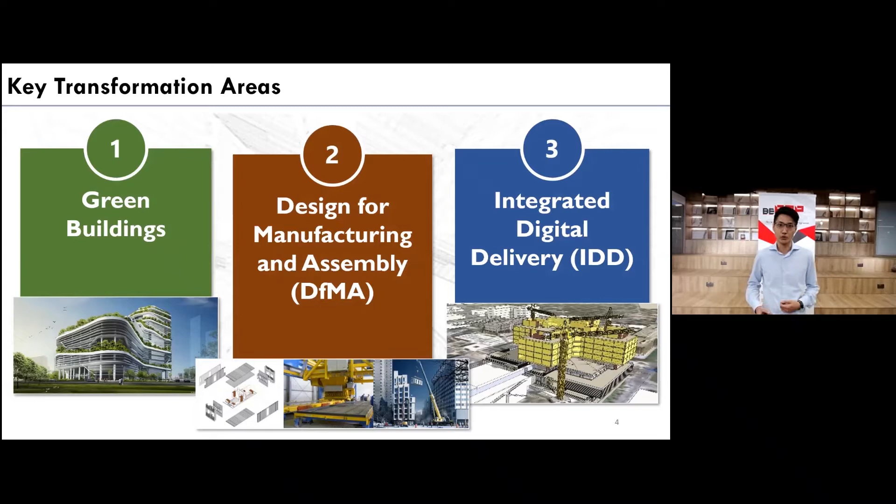To drive innovation and enterprise in these focus areas, BCA adopts a holistic approach. For example, with BEAMP, built environment firms are encouraged to pose their business challenges to the global innovation community. This is to widen the innovation base and to allow even proven solutions from outside our sector to be adapted for our needs.

Shortlisted innovators will develop the solutions with advisory from the challenge owner, who will also provide a test bed for the solutions. In the process, innovators will also receive co-funding support and be plugged into the sector for market development.

While BEAMP provides a platform to drive innovation development, we are also mindful that regulations clearance may sometimes impede adoption for certain technology, particularly when the technology is new in Singapore. Therefore, BCA also provides a one-stop solution called the Build Innovation Panel, or BIP for short, to facilitate the review of existing regulatory requirements that may discourage innovations.

For innovation projects which require guidance in regulatory matters, BIP will help to pave the way forward at any juncture during the course of innovation development. We also like to point out that BIP also facilitates regulatory clearance for industry-ready solutions that benefit the built environment, regardless of whether they came in through BEAMP.

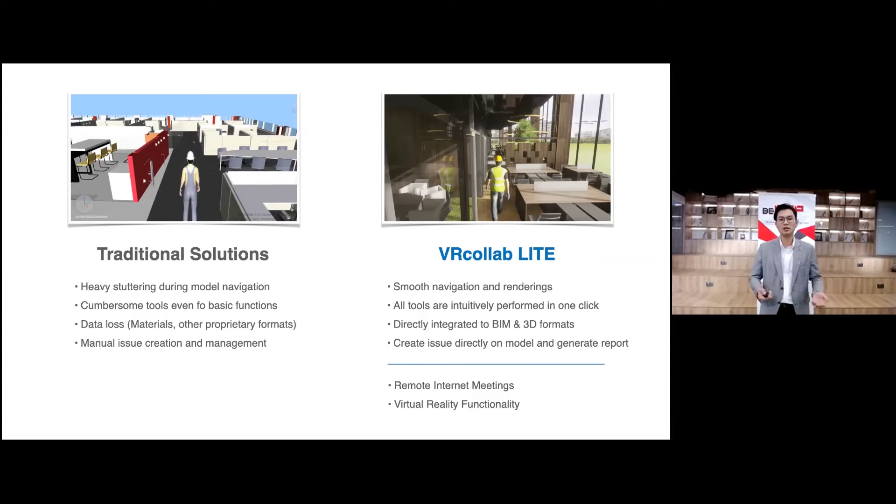So we recently commissioned a study whereby we studied 15 general contractors and builders around the world, who are our clients. This comprises about 217 surveyed users globally. Before using VR Collab, the man hours taken to coordinate in a week is approximately 90 hours or so. But after using VR Collab, week-on-week comparison, they managed to save about 20 hours a week coordinating with VR Collab compared to the current traditional way of doing things.

So coming to the end of my presentation, there's also a bit more of not only the product, but the projects and R&D that we're currently involved in.

For BEAMP, we were the first batch, and we're doing an HDB Auto Checker. For those of you that do not know, for the international audience, HDB is the Housing Development Board of Singapore, and 60% of all construction projects in Singapore is actually owned by HDB. So our Auto Checker allows us to check the building codes according to the BIM model that's submitted to HDB automatically.

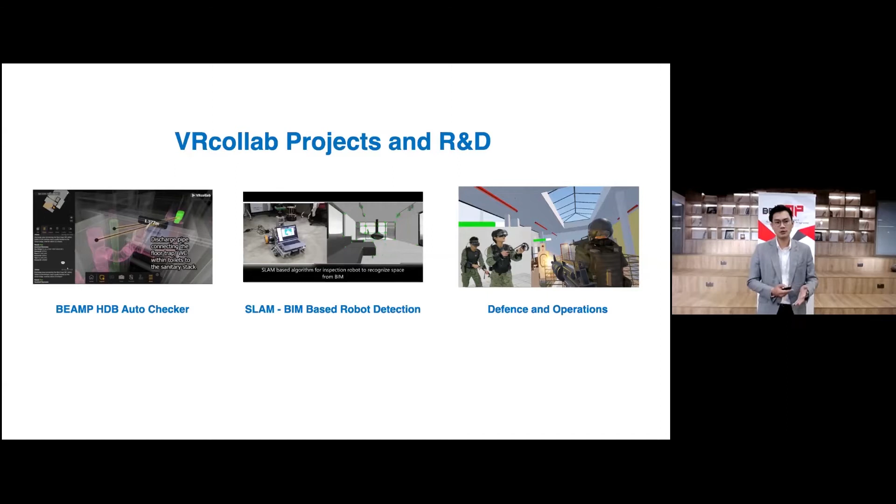Up next, we have Aviation Virtual. Aviation Virtual uses BIM-based AR for dimensional and spatial verification. Aviation Virtual, please.

Hi, I'm Chilang from Aviation Virtual. We are a 6-year-old SME, and together with Hendrik from the University of Glasgow, let me present to you our product, which is called BIM-based AR for dimensional and spatial verification.

So if you look at this, 3 simple steps: look, load, and verify. And with that, you could automate non-compliance checking and reporting for building design specifications and regulatory requirements. This product was conceived to solve this identified problem: how to conduct checks easily, faster, accurately, and also cut down on the back-end reporting writing.

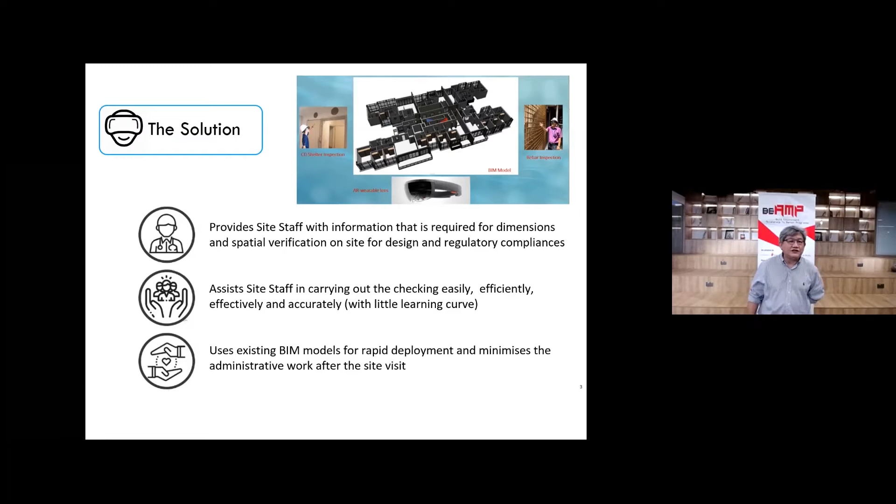Well, let's look at what the solution actually is. There are 3 important selling points for this solution. One is that we provide the staff with timely and accurate information needed to do their work on site. We also assist the site staff to carry out the checking easily, efficiently, and effectively. And finally, it also allows the BIM models to be deployed rapidly.

And I think in a nutshell, if you look at the product, the important takeaway is that within minutes, we could actually automate the detection of non-compliance, send images and data, or communicate with the site office, and at the same time generate the report for the site visit.

Besides the automated inspection and the BIM-based solution, we could also see that it will cost less compared to what exists, doing away with forms. In terms of data presentation, we're actually going to do it in 3D, VR, and AR. There'll also be tracking of the user, as well as automated signatures so we understand who the user is, and the data integrates with the BIM solution.

So what is the unique selling point of this solution? Well, the first is that we're transforming inspection with augmented reality. We also allow deployment of existing BIM models from any native software for rapid deployment as 3D models to be used in VR and AR devices, and finally allow you to carry out checking of buildings under construction and TOP easily and quickly.

So what is the business model? Most of our revenue will come from selling the product as it is. We could also customize the solution for different users, provide pay-per-use site services, as well as subscriptions, and also be involved in site projects.

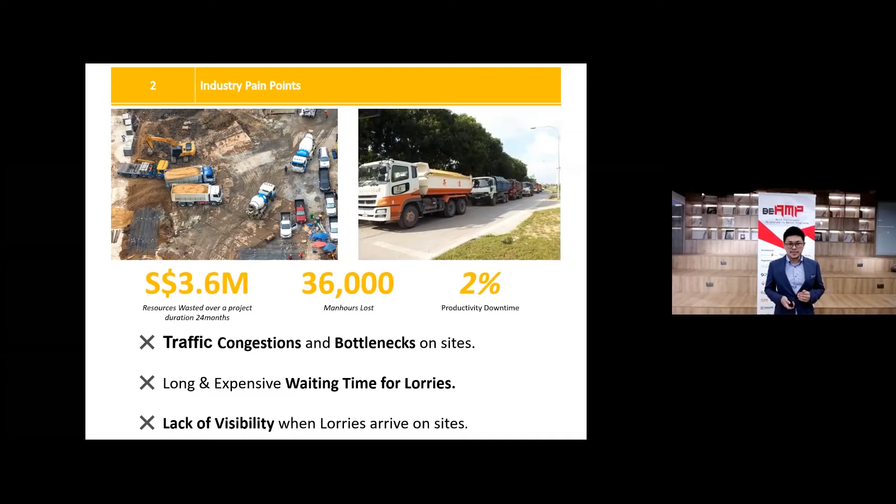So what is the solution? Espada DMS, which stands for Espada Delivery Management System, is a tool to help main contractors manage and monitor all deliveries to the construction site with a time slot management system and delivery scheduling. Subcontractors and suppliers will submit a delivery request, and the main contractor will either approve or reject it based on the availability of a slot and the priority of the material needed on site.

Once the subcontractor starts the journey, the main contractor can trace in real-time the location of the lorry and will be auto-notified of the incoming delivery. After the lorry has reached the site, the gate manager can check the condition of the material and check in the delivery status as completed.

With Espada DMS, there is no headache, no more congestion, no more bottleneck on site, which means that resources are used more efficiently and projects can run smoothly.

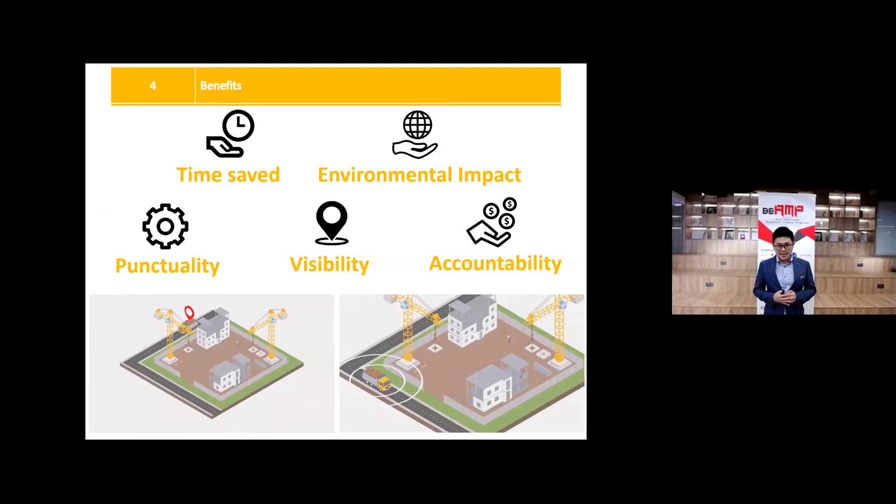So what are the benefits of Espada DMS? Main contractors save hours of waiting time. Queuing time for lorries is reduced. We also note reduction in CO2 emission and carbon footprint for your projects. Subcontractors and suppliers will be more accountable because they want to deliver on time to keep a good record.

Now, in terms of committed projects going forward, we will be running a test bed at BCA Academy Phase 2 and GTC multi-story recycling facility with Dragages and Boustead, with the main objective to reduce traffic congestion on site and queuing time for the lorries.

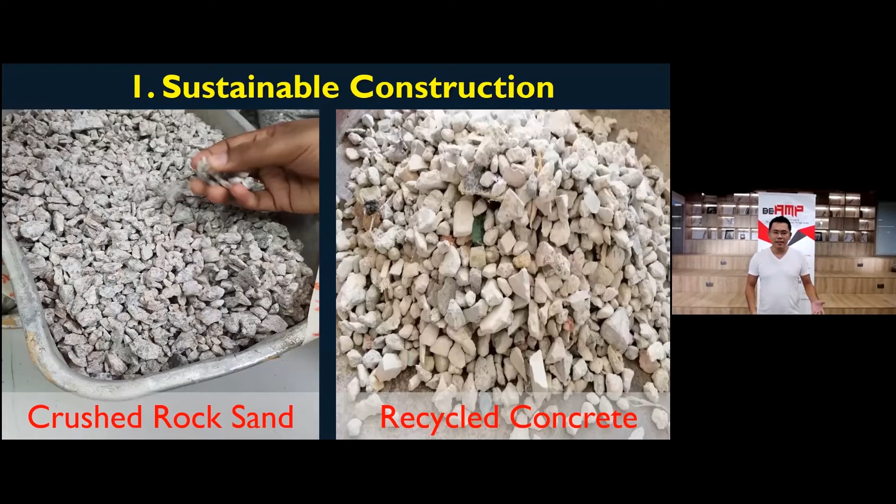Why it matters? Sand and concrete are key components of construction. Every year they cover about 1.2 trillion in market share. It's massive and impactful.

Environmentally, natural river sand has a limited source, and crushed rock is common and can be used as an alternative for sand. On the other hand, concrete has a very high carbon footprint. Recycling concrete can be a solution, but there's a catch.

Both need to meet stringent requirements, and they are currently qualified by human laborers, which is very labor intensive.

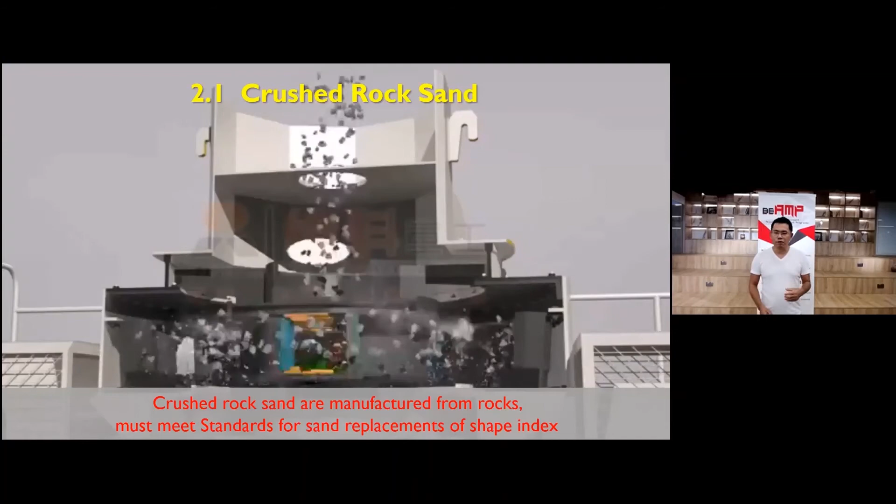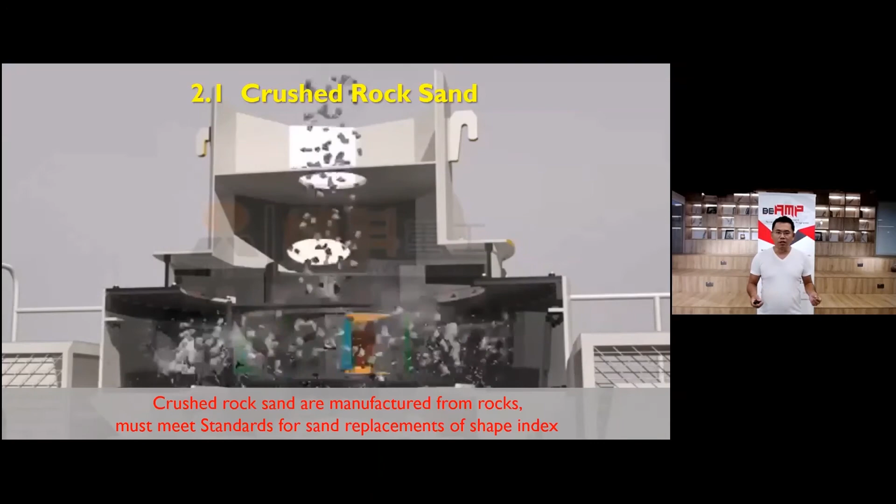Crushed rock sand is manufactured from rocks. As you can see on the screen, the resultant crushed rock can be different elongation and size to be used as a sand alternative. They need to meet British EN 933-4 standards. In a certification lab, crushed rock sands pass through a series of filterings before they are measured one by one, laboriously using calipers. Vebits wants to automate this.

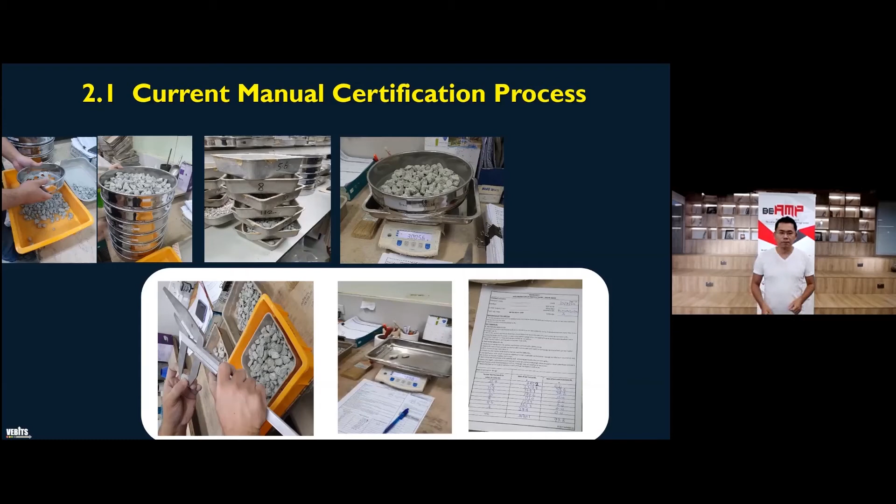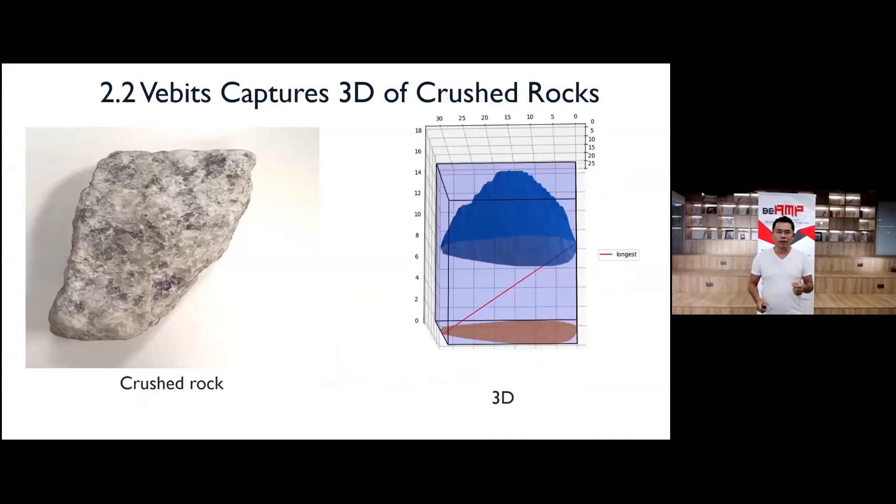Vebits employed computer vision technology to capture a 3D model of crushed rocks. From the 3D models, the elongation and shape index can be calculated mathematically. Compared to manual measurement using calipers, our solution can achieve very high accuracy, about 1% error. This technology has attracted interest for other applications now.

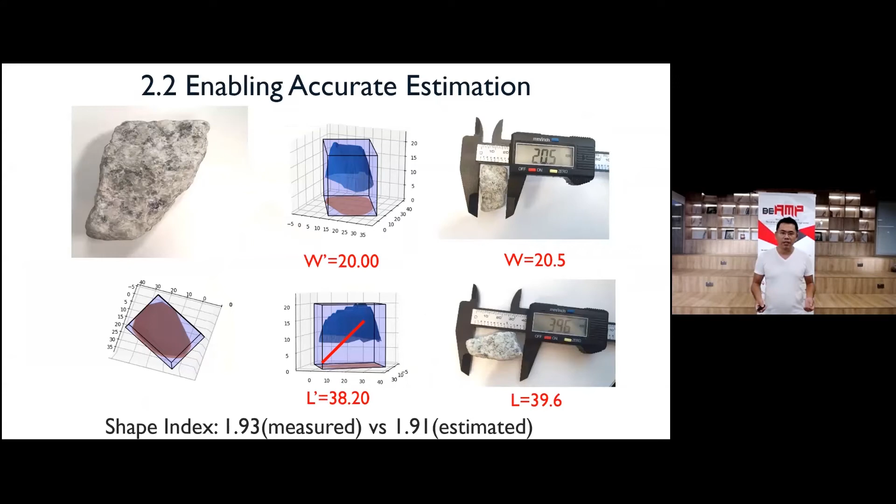On the other hand, recycled concrete has a challenge of purity. To be used for buildings, they need to maintain a very high purity level. Currently, this is done by a team of workers who manually pick up impurities from a conveyor belt. Vebits wants to automate this.

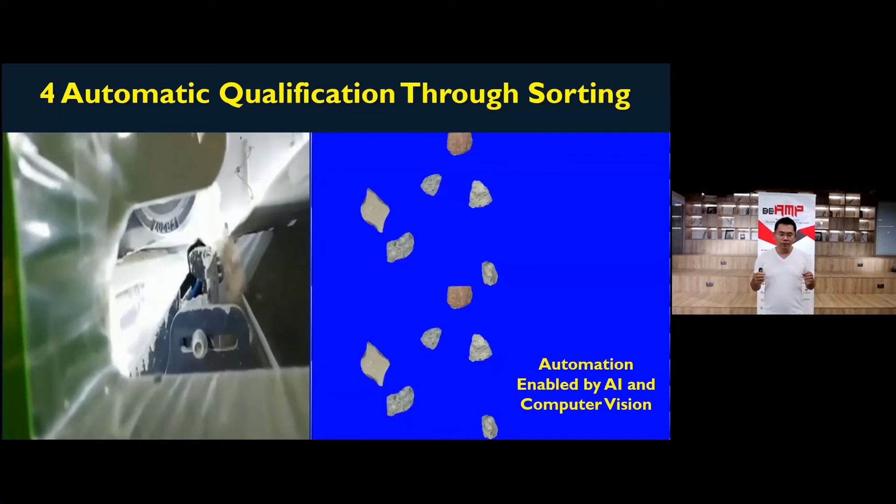Vebits developed very innovative multispectral AI technology to accurately recognize concretes and foreign materials. Now we are putting these technologies, including the stereo and multispectral AI, into a sorting machine, separating the concretes from foreign materials.

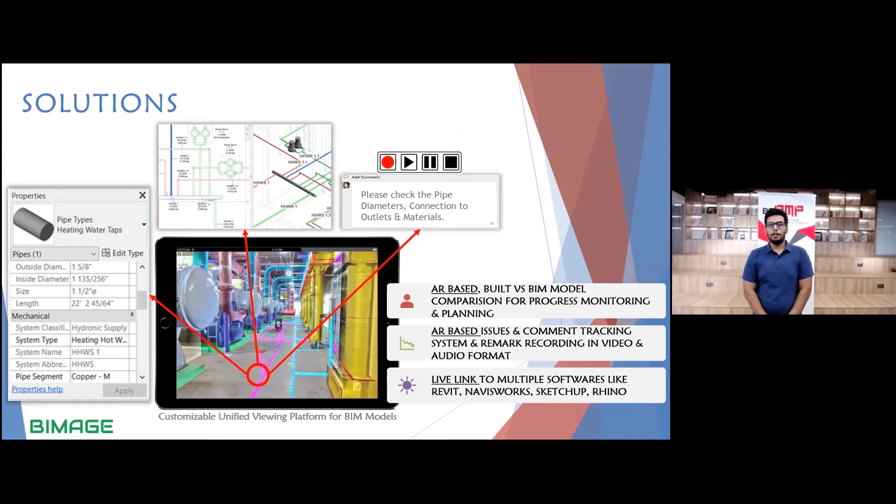Third, our application's live link tool can incorporate and visualize feedback in real time. This will ensure seamless collaboration, especially during coordination meetings and client presentations. The live link tool will work for an array of softwares.

Fourth, AR-based 4D construction simulation will give owners and designers the power to visualize the project on an intricate level. Owners can make better decisions on project timelines, whereas designers can better visualize outcomes of their project planning and reduce risks. Fifth, our application can generate a standalone digital twin export of the BIM model along with the 4D timeline.

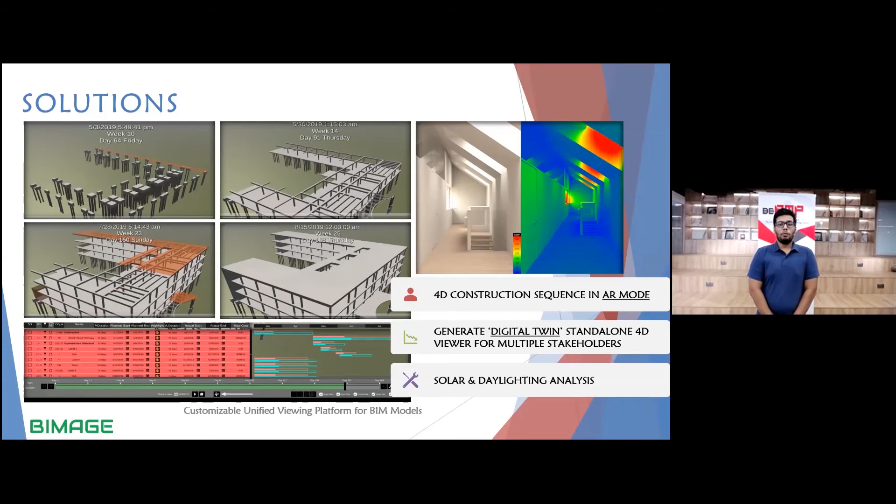This will help stakeholders visualize and plan remotely without the need of any software installation. Sixth, solar and daylighting analyses can be used by designers to optimize their designs to create a more sustainable building, maximizing shading and minimizing cooling loads.

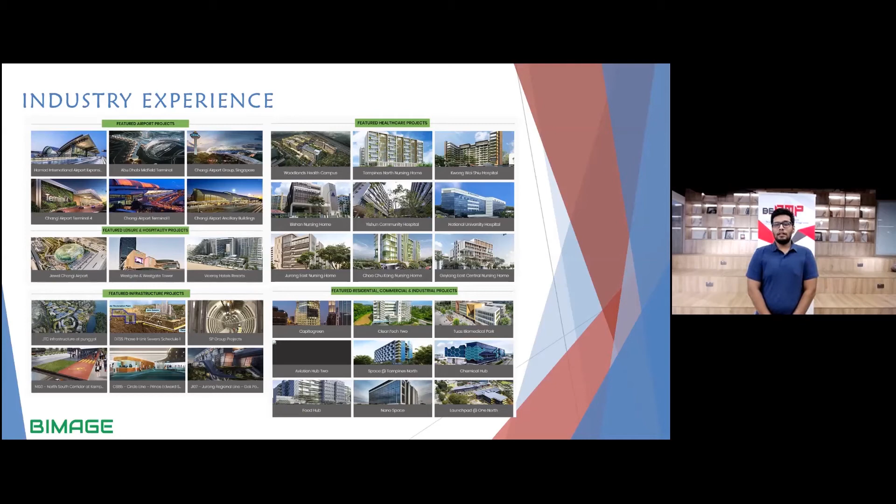Industry experience: BIMAGE has successfully completed over 400 projects in infrastructure, airports, commercial, healthcare, industrial, and residential sectors. Over the years, we have won BCA BIM awards for several projects. BIMAGE Consulting was also named Singapore's fastest growing company in 2019 and 2020 by the Straits Times, and the fastest growing company in the Asian Pacific region by the Financial Times.

We work with almost all the major contractors and companies and government agencies like LTA, PUB, NUH, etc. We have also partnered with educational institutes like NUS, NTU, and Temasek Poly.

The product testing will be done utilizing a spectrum of users ranging from contractors to owners to industry experts. The testing outcome will be used to refine our product to precisely match industry needs. We will then adopt a AAA process: awareness, access, adoption. This will be our go-to-market strategy.

Our marketing team will work to increase market awareness for the product. Our sales team will ensure that prospective users have access to the product, and our technical team will ensure proper adoption of the product into the workflow of the users.

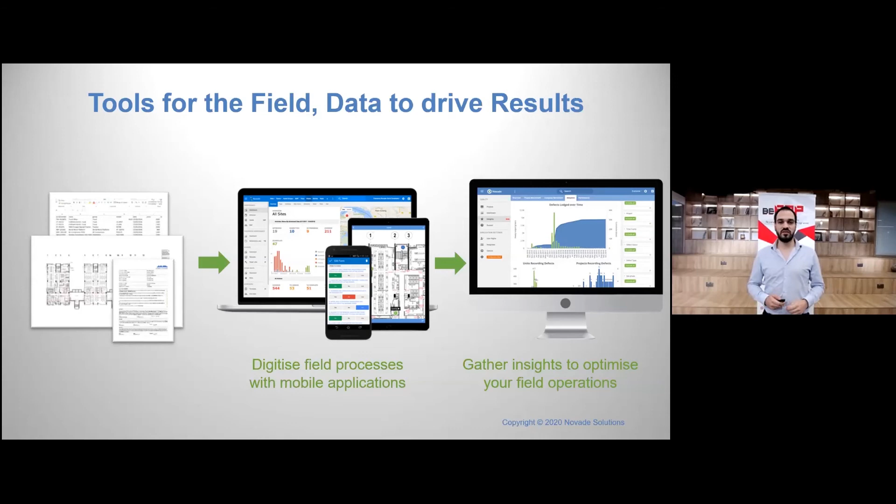With Novade, you can change the way you work with an integrated platform connecting all projects and users in the field. Let me show a bit more. So you can digitalize your forms, your layout, your PTW, permit to works, WhatsApp group, Excel, all into one single platform. Also, from all this data, which already gets better productivity, you can gather insights to take real action on your site and know what's happening. So we drive significant business benefits, productivity, quality, and safety on your construction site.

I would like now to take a bit of time to show you a specific case for this PPVC project. Novade works with Dragages to digitize their site processes. Dragages is a contractor in Singapore that does both traditional sites, but also PPVC modules, meaning they will do modules in a factory, bring them to site, and do much better construction, generally faster, with better productivity and quality control, often beating the target time.

Now, we help them in digitalization and also to drive better productivity. From this data, you want to get better visibility. So a challenge is, how do you get better visibility? With dashboards, by leveraging the data and also analysis. Today, the main contractor's job is to build buildings, not to do analysis. So we help those companies do the analysis and focus on construction.

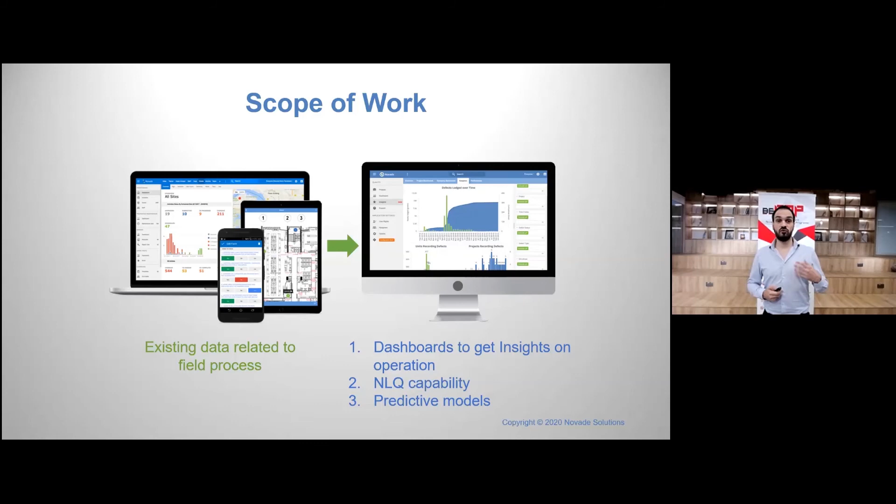The scope of work is in 3 phases. One, dashboards to get insights into operations for actionables. Two, NLQ capability, natural language query, to help you ask direct questions on your data and get answers. And three, predictive models to know how the future will be on your site.

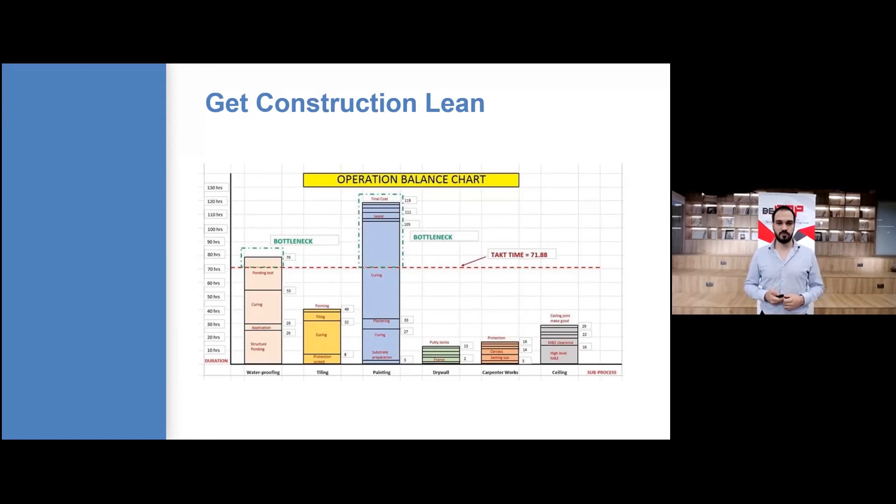Let me dive into a few examples. One, get construction leaner, an example of a dashboard that comes from BCA Academy with operation balance charts. Here you have an example with TAKT and bottleneck. From this automatic analysis, meaning the contractor doesn't need to do anything, you will have direct information. You can see waterproofing and painting are taking more time, and that's where you want to put more resources or improve your processes. This helps you improve your site.

Second example, understand your site better with simpler access to information directly on your mobile phone or computer, web app, and you can directly ask questions. What is my underperforming task? And then you get a direct answer. Or, where should I improve? What is this information in September 2020? And you get it.

We are very proud to work with industry leaders around the world: real estate companies, developers, main contractors, builders, and operators. Today, we are looking for more clients and partners to choose Novade.

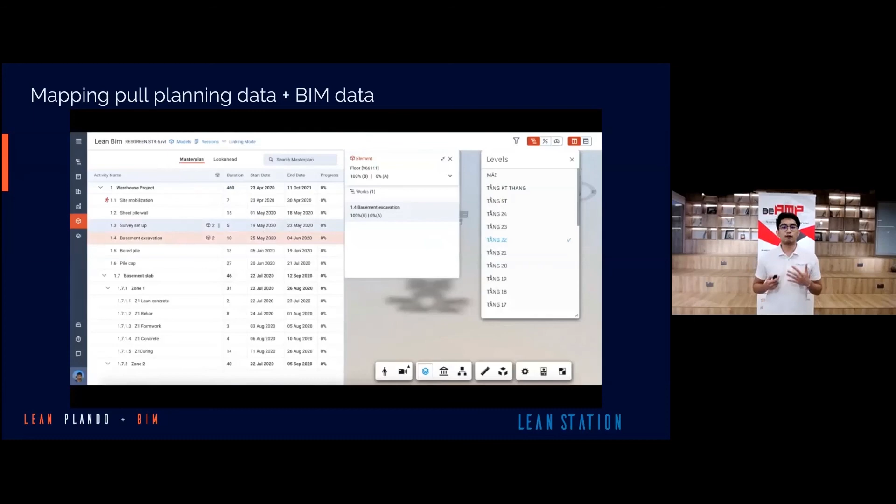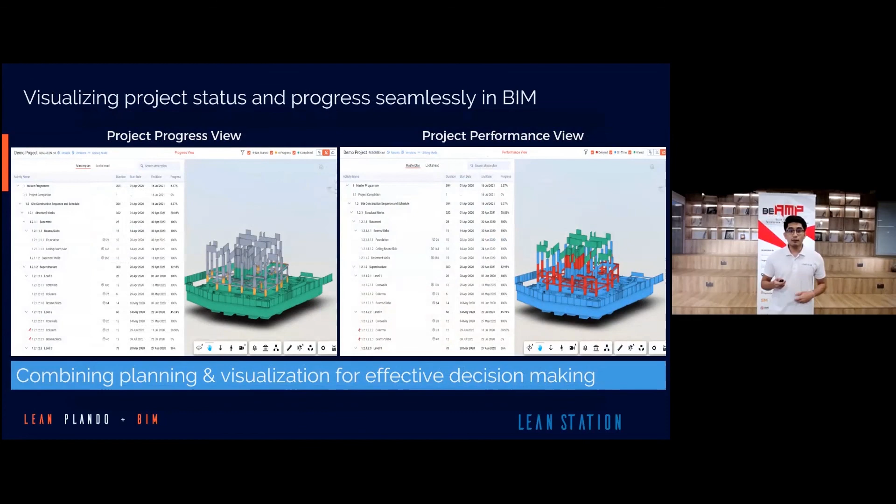So this is Lean Plando BIM. As you can see, it has very powerful features for linking your project data to the BIM model components, and it provides the spatial planning environment for engineers to visualize the sequence of works that happen on site. By linking this data, you'll be able to visualize project progress in real time, analyze and visualize the challenges you are facing on site, and know which components are delayed and which are advanced.

The next module is called Lean Plando Smart Planner, which provides suggestions during your planning and collects data to improve your planning accuracy over time. It relies not only on the database of our existing projects, but also learns from your actual project and gives suggestions based on your particular project very accurately.

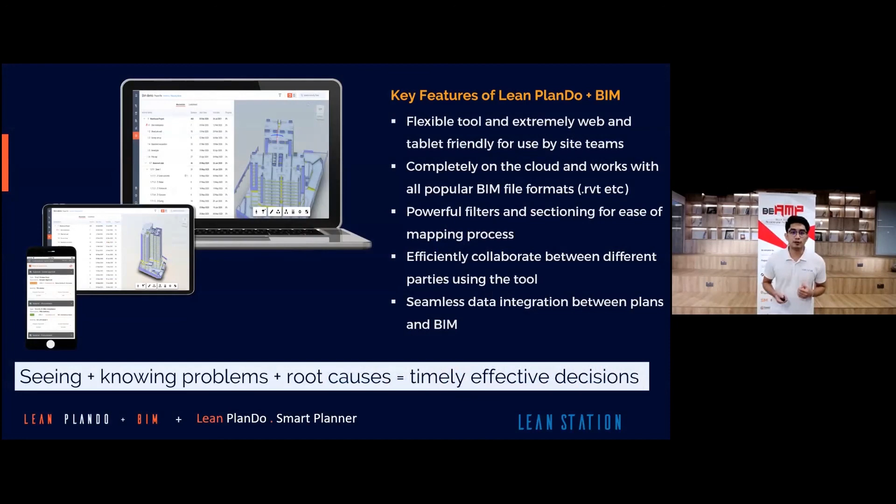The entire ecosystem of Lean PlanDo is completely browser-based and cloud-based. Lean PlanDo BIM is compatible with all the popular BIM formats, and it runs comfortably on all types of devices. So if you're using Lean PlanDo BIM and Lean PlanDo Smart Planner, these are the benefits you will achieve.

We are looking to testbed our Lean PlanDo BIM and Lean PlanDo Smart Planner in your actual live project. If you have a construction and building project, are using BIM, and have implemented Lean PlanDo, you'll be able to testbed Lean PlanDo BIM. For Lean PlanDo Smart Planner, it will be more effective for projects that are repetitive in nature.